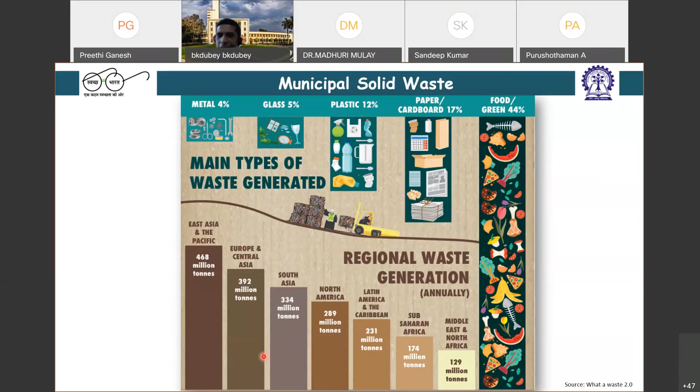If you go to Singapore, if you go to Seoul, if you go to any such places, they don't change their policy overnight. When they make policy, they do a lot of deliberation, a lot of discussion goes on—you have to bring all the stakeholders to the table.

So tomorrow, if I say compost should have this quality, but as a city I don't give them source segregated waste, yet I'm telling the compost company they have to maintain this quality—how will he do that? That's totally ridiculous. How can a company produce a good quality product if the raw material coming to him is totally bad? He will not be able to. Expecting him to produce a good quality product means that person does not understand waste management.

So looking at the components, food and green waste is 44% globally—that's mostly what you can go for composting. This is the global figure; the Indian figure is slightly different. Now, in terms of what is happening with this waste, open dumping—again globally—33%, one-third of the global waste, is just going to open dumps.

One third of the global waste is just going to the open dump, that's not even a sanitary landfill. I'm assuming all of you are civil engineers or have some environmental background, so I'm not talking about what a sanitary landfill is. I'm assuming you know, and if you don't, you can always ask me. So it's 33% just going to open dump.

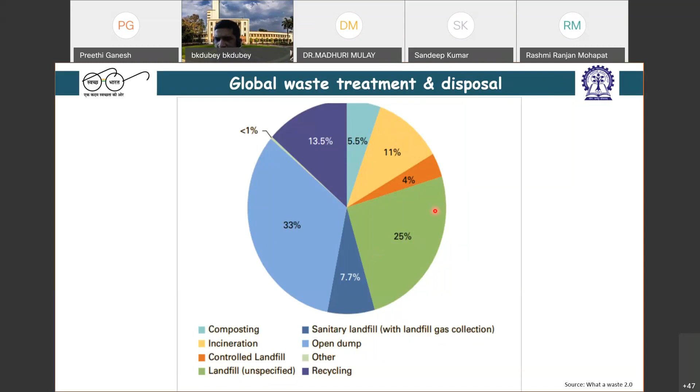If you look at the income level, low income countries have 93% open dump. Low and middle income countries, 66%, 30% in upper middle income. Even in high income countries, 2% is open dump sites. So it's not that high income countries don't have any dump sites. In the remote areas in high income countries, you will find dump sites. In the Appalachian Mountains in the US, in Tennessee, Virginia, North Carolina, that area, you will find some open dump sites.

Then landfill is the sanitary landfill. As you go from high income to low income, you can see that high income actually has less landfilling, but they do a lot of recycling, 29% recycling, 22% incineration, which with incineration is thermal treatment, not open burning. Open burning of waste is totally no, you should not do that. And as you go to the lower income countries, you see only 3% is sanitary landfill, 3.7% recycling.

Now if you look at the Indian data, we say we recycle. I think sometimes we say almost our recycling rate is pretty high if you look at the CPCB document. But those are informal recyclers, and they do a very good job, nothing wrong with that. They do a wonderful job in terms of recycling. But the proper data collection is not there, so we don't really know the proper data collection happening.

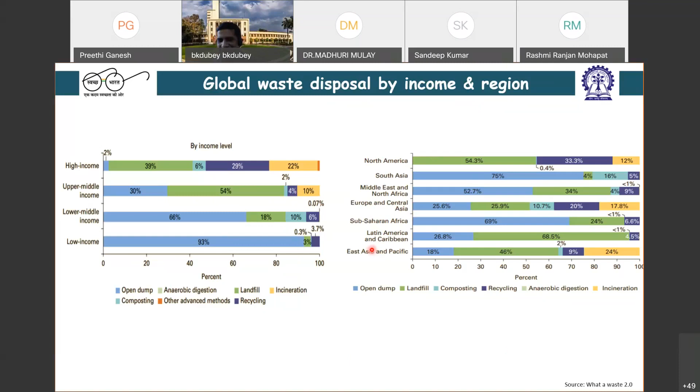Okay, thank you. So if you look at it by income, because in a country like India, which is so big, the example I was telling you works like this: if you are in an urban area and want to set up a compost plant but are not able to sell the compost in nearby places, then it becomes a problem. The plant will not be sustainable for a long period of time.

So to overcome that, you can go for anaerobic digestion where we can produce biogas and use that biogas. That's what we proposed to Guwahati. I don't know whether they will listen to us because they've taken up the report, but hopefully they will, because there is a lot of pressure on Guwahati city to set up a waste to energy plant, like an incineration plant.

Based on our work, which was quite extensive, we sampled Guwahati city for 3 different seasons over about 1.5 years. There are 6 zones, so we sampled in each of the 6 different zones with multiple samples, trying to get as representative a sample as possible from that city, spending a lot of time and energy on it.

Our data suggests that a waste to energy incineration plant, as of the present situation in Guwahati, is actually not a good idea, because they don't have that much calorific value, and they don't even have that much combustible waste. For any plant there is something called economy of scale, you need a certain amount of waste coming in. For a waste to energy plant, you need at least 250 to 300 tons per day, and they don't have that much waste.

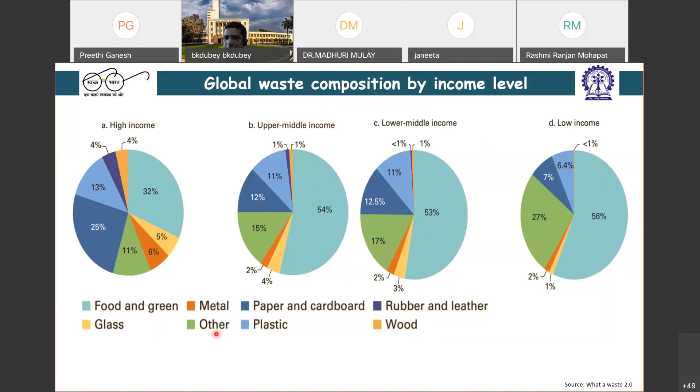Coming back here, if you look at global waste composition by income level, we will be somewhere in the lower middle income category. Around 53% is food and green waste. So there is a lot of potential to produce compost in India if we keep this food and green waste separate. If it gets mixed up with plastics, metals, and glass, then the compost will not be of good quality.

And if you look globally, a lot of food is wasted. Unfortunately, that tendency is coming to India too. There was a study done in Canada a few years back where they found that a typical family...

So, any question? If you don't have any question, please mute so that we don't hear that background noise.

So what I was trying to say is that there was a study done where it was found that a typical North American family wastes close to $1,000 worth of food in a year. That's for a family of four, and Christmas just went by. So $1,000 divided by 4 is $250. $250 will buy them a very good iPad today. So they could have bought a good iPad for all four of them if they had not wasted this food.

It's... all organisms... Preeti, can you please mute? Or if we have somebody from NIT Warangal, if you can mute him or her, that would be good. I'm not able to mute her. So please mute so that we don't get that background noise. It's irritating, isn't it? If you have some question, please ask, otherwise please mute.

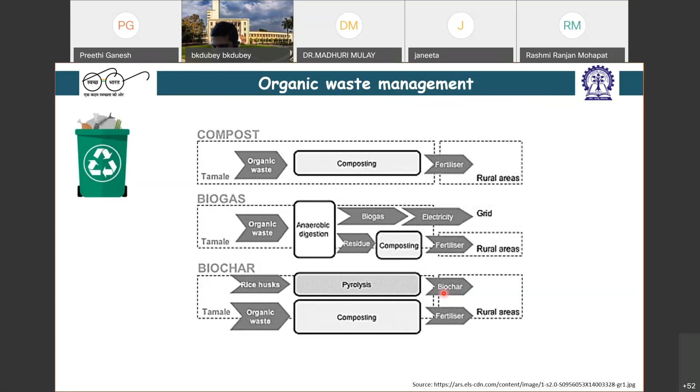That's what our lab study suggests, that we have to do a pilot. We are looking for some pilot partners, and some companies have approached us as well, where we are trying to do some pilot work on that.

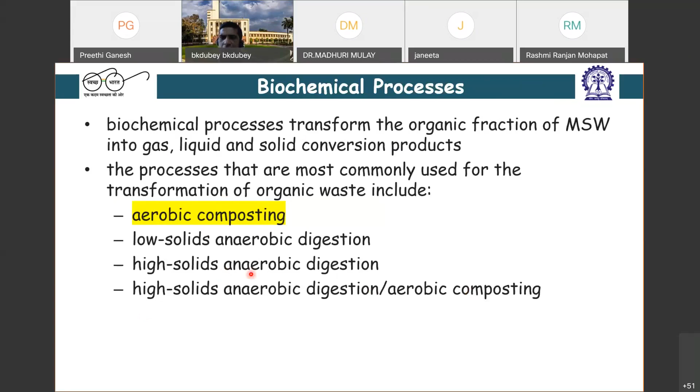In terms of biochemical process, you may have heard from other professors in the last four and a half days about different biochemical processes. Aerobic composting is what we are focusing on here, and then there are low solids anaerobic digestion, high solids anaerobic digestion, and aerobic composting. Those interested can look at the biological treatment chapter from the course on YouTube that one participant just mentioned. The major objective here is to convert the organic matter in waste into a stable end product.

Aerobically, we call it a composting process. Anaerobically, we call it a fermentation or anaerobic digestion process. Composting is a succession of facultative and obligate aerobic microorganisms. They feed on the organic matter and convert it to new cell tissues, and that's how compost is formed.

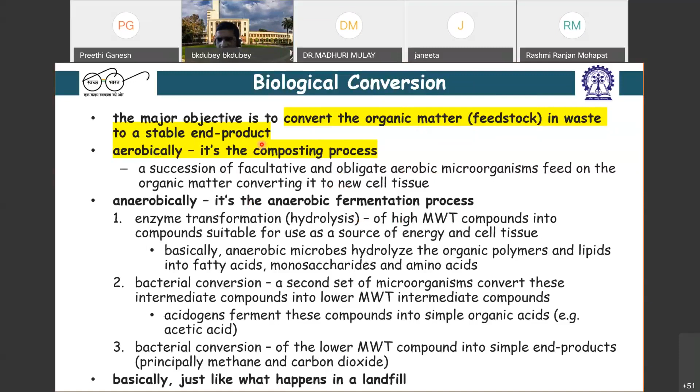Composting is an aerobic biological process in which naturally occurring microorganisms convert biodegradable material into humus-like compost. It's basically biological reclamation of organic material, a natural decomposition process. You can see decay of fallen leaves, decay of wood, animal carcasses decaying in a preserve.

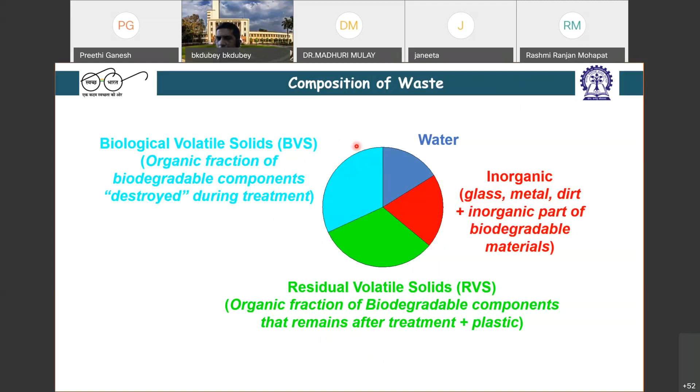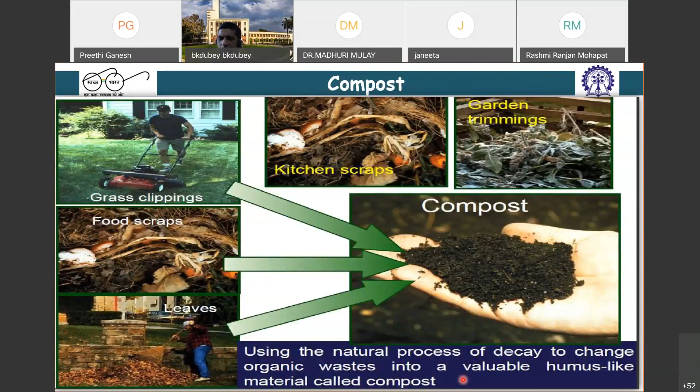Compost can be made from grass clippings, kitchen scraps, garden trimmings, food scraps, or leaves. All these things can be used to make compost. It's a natural process of decay of organic matter into valuable humus material, which is called compost.

Now, composting, you supply organic material, you supply some minerals, because any biological treatment, it's the microbes doing the job. It's aerobic microbes here, and in anaerobic digestion, it is the anaerobic microbes. So it is the microbes which do the job for us.

What we are doing as a compost engineer, solid waste engineer, or environmental engineer is creating the condition suitable for these microbes to work. It is the microbes which do the work for us, and we have to make the condition suitable. Microbes need oxygen because it's an aerobic system.

So you need oxygen supply, and it has to be distributed nicely through the compost pile. You also need to give them some minerals and water. Minerals, because when we eat, we do not only eat rice and dal, we need fruits, vegetables, and other stuff to supplement our mineral requirements.

This bacteria, the microbes, also need to have some strength so they can proliferate and their population can go up, and they can carry out degradation of the waste. For that, you need to provide certain nutrients. We have to have a proper carbon nitrogen ratio, and of course moisture is needed for any microbial process.

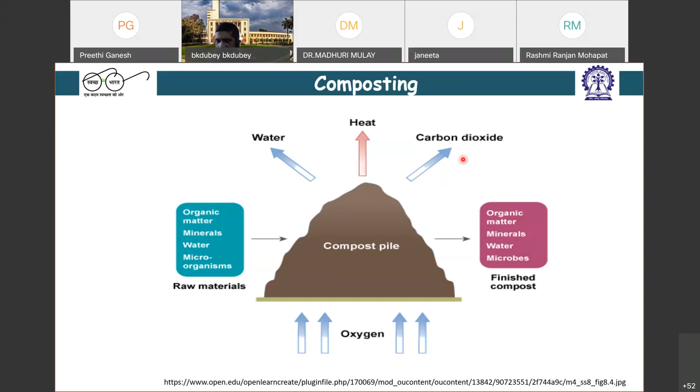Carbon dioxide also gets released. It's an oxidation process, so carbon is getting converted to CO2 as well. So in composting, you need to have a better feedstock, which has a good carbon nitrogen balance.

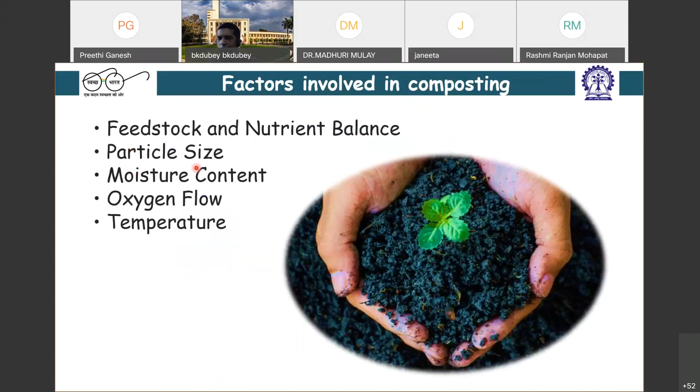So that's why nutrient balance matters. You have to have a good particle size for good moisture, good air movement, moisture content, oxygen flow, and temperature. I'm pretty sure you talked about this earlier in different lectures over the last 3 days, isn't it?

So these are the typical carbon nitrogen ratios. We can go over that a bit faster. I think I have another half an hour, so I'll go a little faster, and then we can keep some time at the end for questions and answers. So this is your different kind of feed.

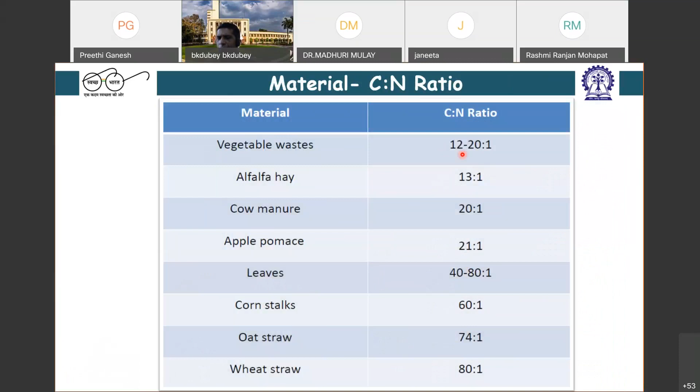So that's your carbon nitrogen ratio. We need to have an optimum carbon nitrogen ratio of around 25 to 30. So we have to mix material which is high in carbon and low in nitrogen with the other way to get the optimum ratio.

We already talked about carbon nitrogen ratio between 25 to 35. So that's carbon to 1 nitrogen. Particle size around 50 mm. Moisture content 50 to 60%. There's the airflow given, and temperature 55 to 60 degrees centigrade for the first 3 days.

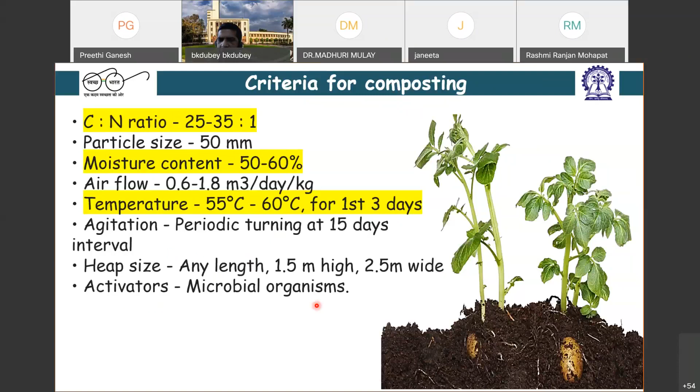So in terms of optimal composting, you need oxygen concentration in the range of 13 to 18%, and the particle size is between 3 to 50 mm. Your carbon nitrogen ratio is certain based on your active composting, curing, and product. Moisture content, temperature, pH - all those you can look at.

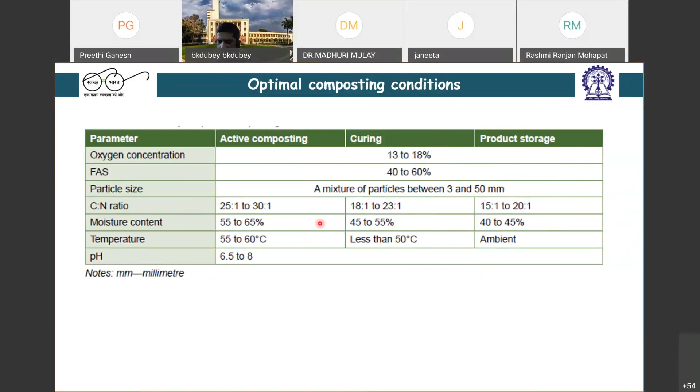There is a CPHEEO manual which you might be familiar with. The Swachh Bharat document, the big compendium of Swachh Bharat, is also there, which talks about these conditions too. So you will find similar numbers in terms of temperature, moisture content, and all that.

So what is happening here is your microorganisms react with organic matter. They basically use the organic matter as a food source, and they produce CO2, heat, and finally the compost product.

So three phases under optimal conditions. You have a mesophilic phase, which lasts a couple of days at around 40 degrees centigrade. Then you have thermophilic, and then you are also having...

Let me switch off my video. It was telling me that there was some problem with that.

So then you had thermophilic, which can last for a few days to several weeks. Then you can have several months of cooling and maturation phase as well, which can give you a better matured compost.

Aerobic bacteria - the aerobic system we're talking about - so there are a diverse set of aerobic bacteria. We have fungi, bacteria, insects, and worms. So those kinds of organisms work on our composting process.

Anaerobic, again I'm not going into detail on that. So this is the reaction which takes place. You have this matter, your compost, we call it feedstock. In presence of oxygen and nutrients, microorganisms will act on it, produce compost, produce new microorganisms, and the old ones will die and become part of the compost.

Sulfate, and then some heat is also released because of the exothermic process. So the end product remaining after microbial activity is called compost. The new cells, like new microorganisms that are produced, become part of the active biomass, and when they die, they become part of the compost. So that's what they're also - organic matter.

Your quality may go bad, so one critical thing is having a good carbon nitrogen ratio, and many times you have to blend organic waste together to achieve it. For example, digested sludge has a ratio of 15:1, and leaves and other things have a ratio of 40:1 to 80:1. If we mix this together, we can achieve around 25:1. We have to cut it in a particular ratio.

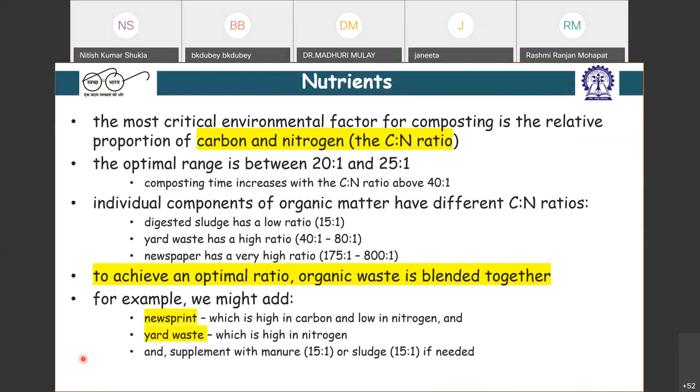Newspaper is very high in carbon, low in nitrogen. Yard waste is high in nitrogen, and you saw other examples which are high in nitrogen as well. So these are some tables of different stuff, which you can find in any textbook. These numbers are available, and you have these slides, so you can look at those later as well.

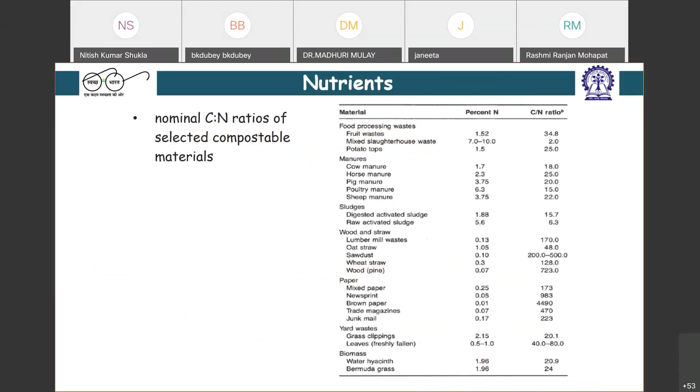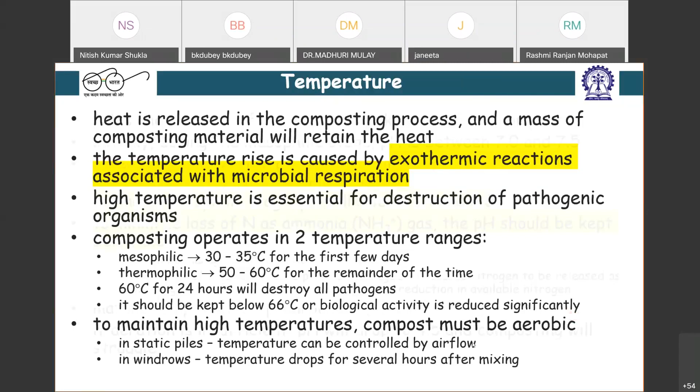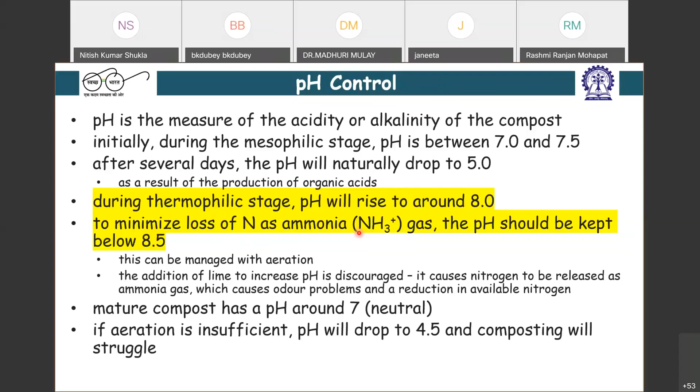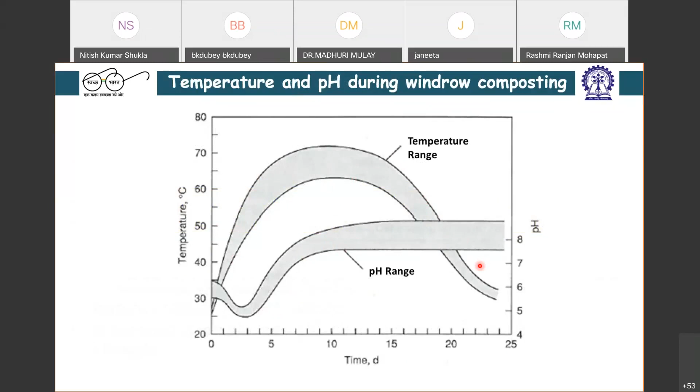So other environmental factors, we have to keep the moisture typically 50 to 60% on a wet basis. We don't want too much moisture. If you have too much moisture, what will be the problem? Your void spaces will be filled with water. If the void spaces get filled with water, air will not pass through, isn't it?

We have to do aeration. It's an aerobic process, so we have to do aeration. If the void spaces are filled with moisture, your aeration will not happen, so it will be difficult to push the air through. That's the reason we have to keep a very close eye on the moisture content as well.

And sludge is a good source of moisture. If we have to add moisture, sludge is a good source. Organism, blending and seeding - you need to have organisms necessary for decomposition. So we do mix 5% of partially decomposed compost back to speed up the process. And again, sludge is also a good source for giving the seed, giving the microbial population.

Particle size 25 to 75 mm is beneficial - exposes more surface area, allows for easy air movement. So you want to make sure that there are good void spaces. You have to do mixing and turning to prevent drying, caking, or air channeling. Channeling is where you get a path where the air is passing through rather than mixing with the entire garbage. So we have to avoid those.

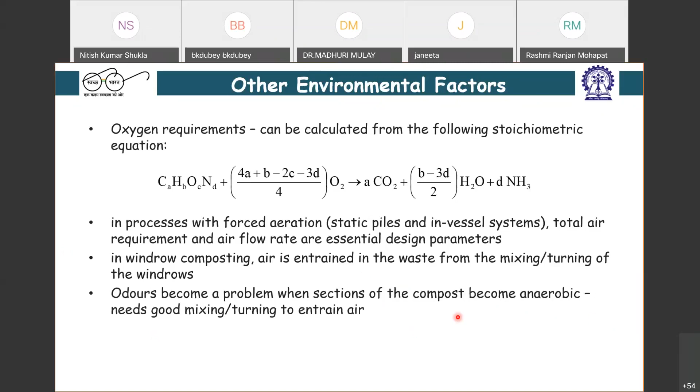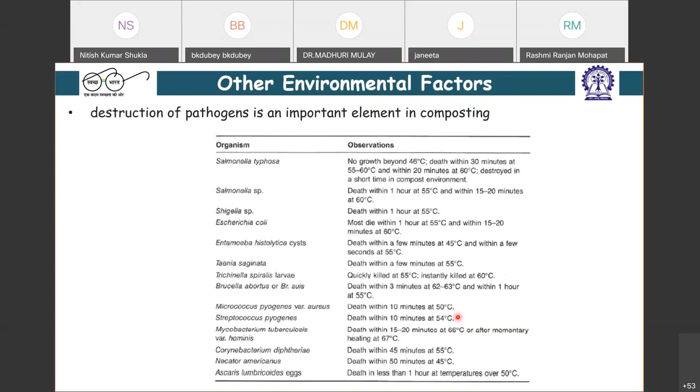This is some example of at what temperature these pathogenic organisms die. You don't have to remember any of these names - just look at the maximum temperature given there, which is 62, 63 degrees centigrade. So if you can just bring it around 65 for some time, for an hour or so, or even 3 minutes - it says 3 minutes at 62, 63, that particular organism will die. Otherwise most of the organisms die at 60 and below. So if we can keep it at 60 and above for some time, for a few hours, our pathogens will be destroyed during the composting process.

Now, how much time does it take for compost? It depends. If you have a mechanical system, you can do it in 7 days. If you have a highly mechanized system, if you have piles, windrows which are turned, it is 9 to 21 days. If you have static piles or some mixing, 30 to 40 days.

There is no composter in the world which can do compost in 24 hours. You may have seen several advertisements in India and some other places too, where they claim that they are doing compost in 24 hours. We are all students of civil and environmental engineering, so we know that it is not possible for microbes to do something within 24 hours. It is actually not possible from a microbial point of view, based on whatever wastewater microbiology we have studied. So if you get that kind of claim, please ask them tough questions, and you will find out that it's just a marketing gimmick. There is no composting happening in 24 hours. So it takes time.

It will, if you have a highly mechanized system, that also takes a week. So it cannot happen before that. You can make something, but that will not be compost. You can make it totally dry and do something with it, but that's not really compost. So when is the process finished?

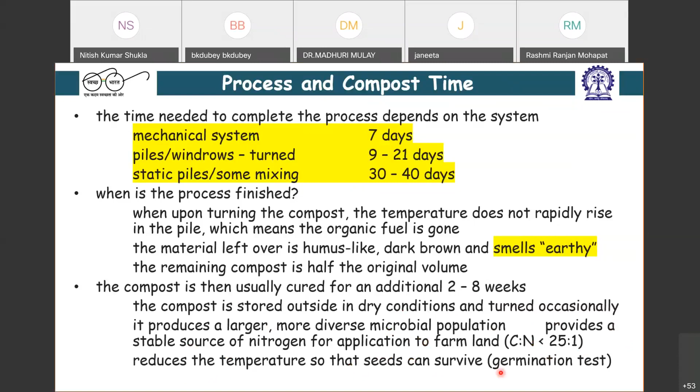So compost, you can put it in dry conditions and turn it occasionally. You have a more diverse microbial population, provide a stable source of nitrogen, and the CN ratio will be less than 25:1. You can reduce it, and also when it gets cooled down, seeds can survive. We do a germination test to find out that quality as well.

Aerobic composting, you can do agitated or static. Agitated means the material is agitated periodically to introduce air. Static means the material remains static, air is blown through the compost. So whatever it gets, it gets.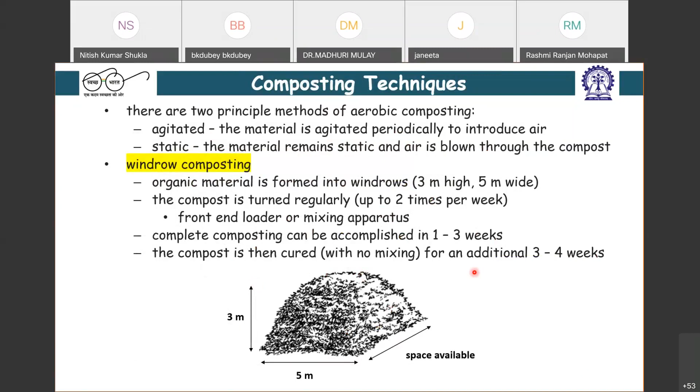Windrow composting, typical, all of us are familiar. You put it in windrows, turn it regularly, you can use a front-end loader. Complete composting can be done in 1 to 3 weeks, then cure for another 3 to 4 weeks to make a good quality. Aerated static pile is where you inject air.

Compost is on top of a blower, so you have a blower system injecting air through it. The blower is controlled by a timer based on temperature, either positive or negative pressure. When the temperature goes down, that means the aerobic microbial activity has gone down. You pump some air, you see the temperature going back up, and then you stop.

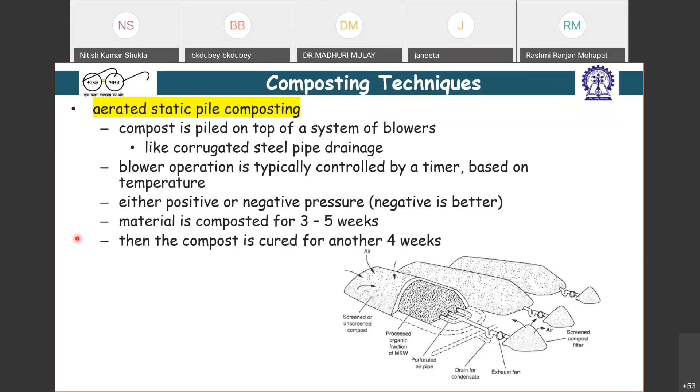Again, temperature goes down, you pump some air. So you can put some sensors, and it can go on automatically. You can blow air or suck air, either positive pressure or negative pressure, both are done. It takes 3 to 5 weeks, and the compost is cured for another 4 weeks, and then your compost is ready.

This is a turner which will go and do the turning part. It will go and mix it as you make progress in composting.

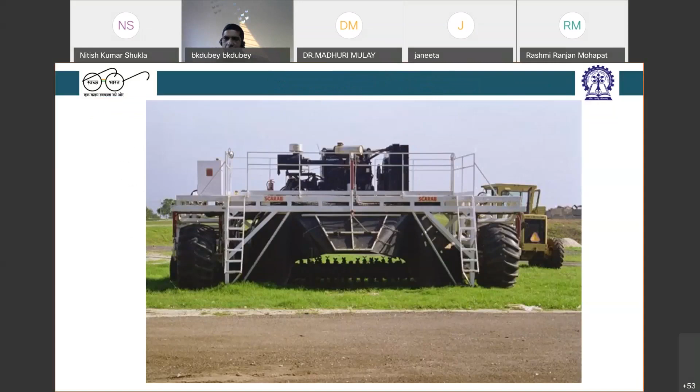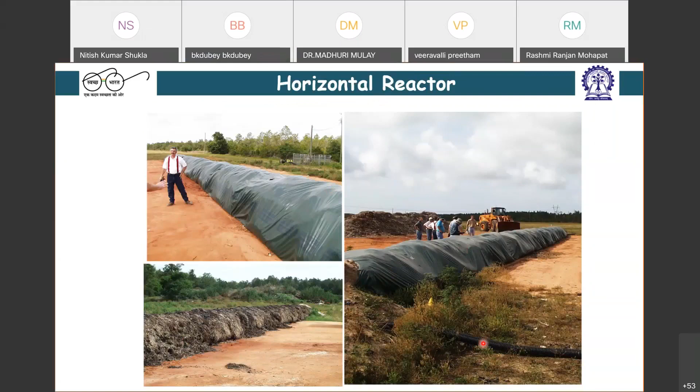Then this is like a reactor kind of compost, this is your horizontal reactor. You have the waste which is covered, and this is the pipe blowing air through it. You can have a mechanical in-vessel system where you put the waste, and it goes from one tray to another tray to another tray and goes down.

By the time it comes down, it has composted. It takes 4 to 7 days, it's a rapid process. You can make this kind of composting, but it's costly. Essentially, you pay for the speed, so it depends on what the expense is.

If you don't have land availability and you have to make compost, you can go for something like this. But if you have land availability, you don't have to go for something like this. Why spend more money if land is not a problem? If land is a problem in big cities, then yes, you can go for something like that.

Again, you look at water content, oxygen, it has better control of temperature and odor. Since the composting process was fast, you need a longer curing time, so you require more curing bed. Land-wise, you're not really saving much, but you can take it to the outskirts and let the curing happen over there. It's more expensive due to mechanical configuration.

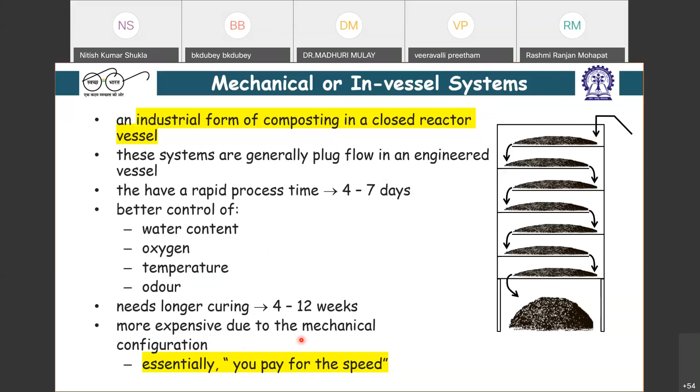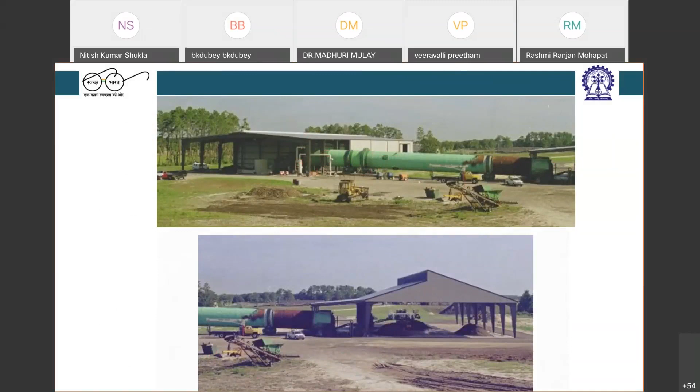So again, it's not compost yet, but it's degraded now. It can be taken to the curing bed where it will be kept for a longer period of time.

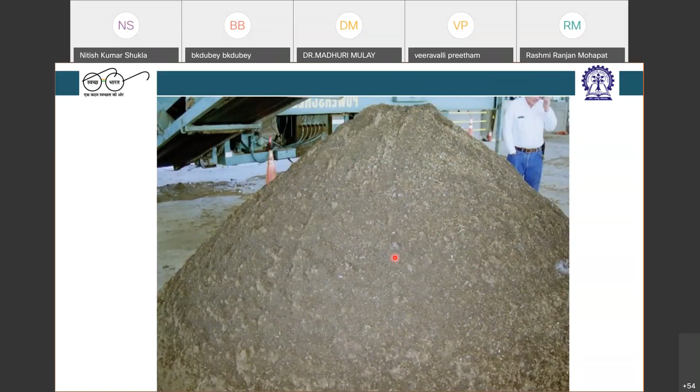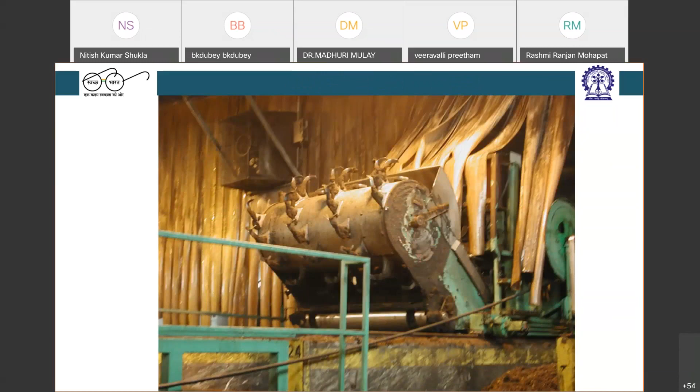You can have these kind of agitated bin systems. You have bins for composting with a mixing device that gets into those piles and keeps on mixing. You see all those hands or teeth, whatever you want to call it, that go into the waste and keep mixing the garbage. It has a long arm that can extend, so it will go into the garbage and keep on mixing them.

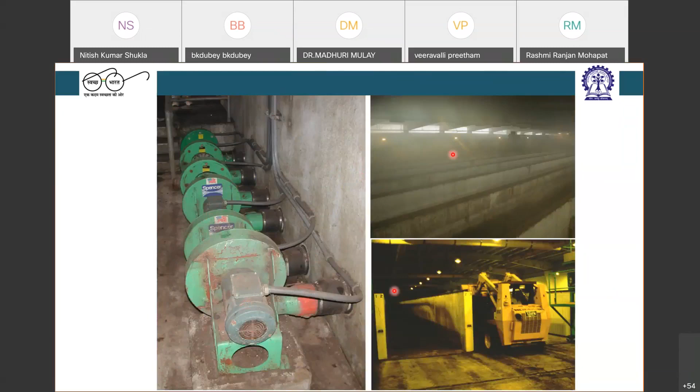And these are the blower systems where you are adding air through to those compost piles over there. And whatever this building inside is, is the compost plant. So even in a good compost plant, you will have some anaerobic activity happening.

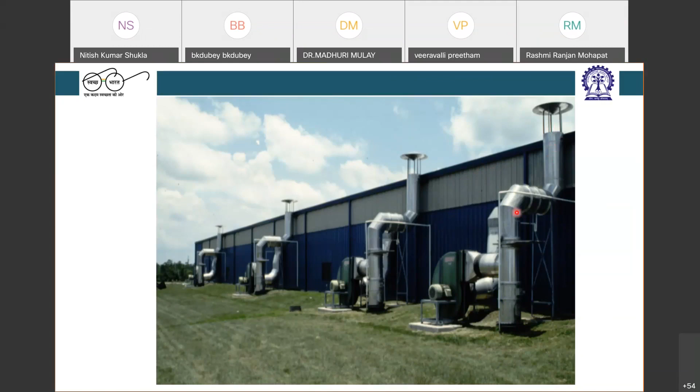So you will have some smell issue, and if you have nearby residences, that smell may become a problem. So what some facilities do is keep this building under vacuum. They suck all the dirty air and pass it through a biofilter, and then the clean air is released to the atmosphere.

You can do backyard composting too, if you have a bigger house. You can do the backyard composting, which can be used as well.

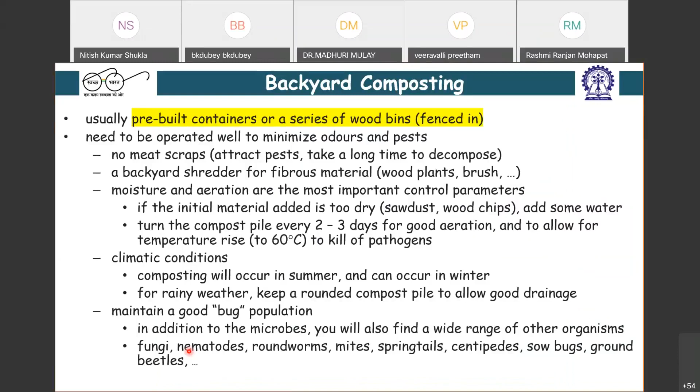So when you do a compost plant design, I think you have already done this, some professor talked to you about that. But just very quickly, you should have enough space to handle at least 2 days of waste. In case of vehicle collection, the surge amount and downtime of the plant should be processed at a uniform rate. Inorganic materials should be separated.

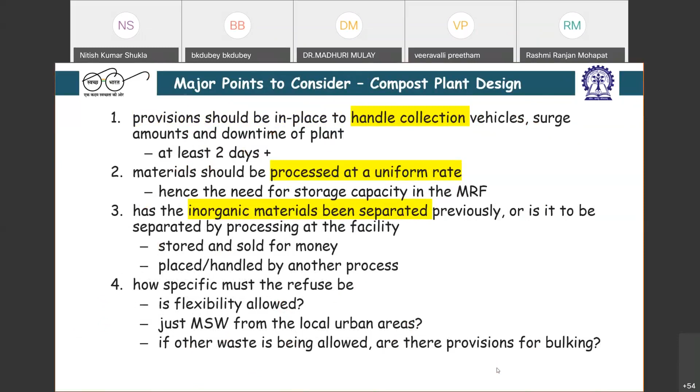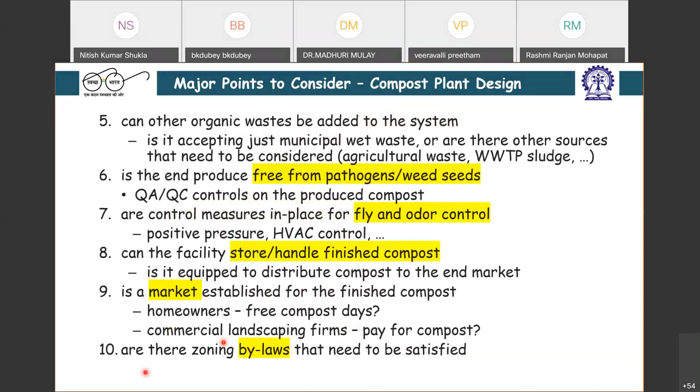You should be specific about how much flexibility is allowed - just MSW from local areas, or are you using some other waste stream as well? Can other organic waste be added, like sludge, agricultural waste, and all that? Is the end product free from pathogens? You have to do quality control - fly and odor control, HVAC control as well, and decide where to store and handle finished compost, where the market is, and are there zoning bylaws in terms of waste collection and all that.

So specifically in terms of design parameters, you have process design, carbon nitrogen ratio, moisture content, composting area sizing, and finished compost storage area, runoff collection - you have to do land treatment design for runoff, because whenever the compost is there, you will have some moisture, which is essentially a leachate, and with the rain and all, you will have some stormwater runoff as well.

So you need to have some sort of collection system and treatment system for that. And costing - how much cost it will be, whether you should go for highly mechanized or manual, depending on the cost.

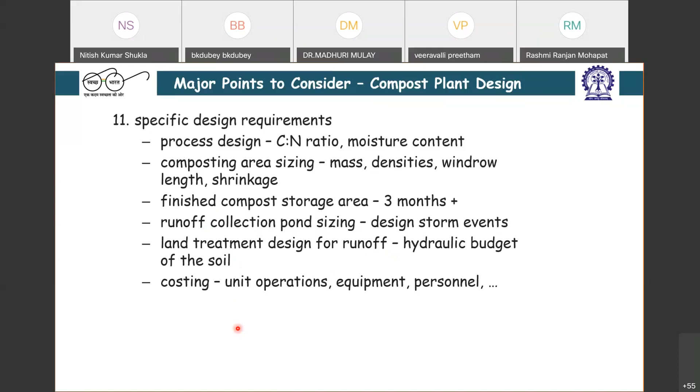So organic residue, if source segregated, could be composted, digested, and taken to market for different applications. In terms of quality, there are heavy metals and all - tomorrow morning you also have a lecture on some of these quality issues. That's why I kept my lecture more on the big picture, what needs to happen to keep compost quality good, but the nitty-gritty detail, I think tomorrow morning somebody is talking about that, as per the program, if I remember, you have something on compost quality too.

So there are heavy metals considered. This is a compost quality standard from Canada - we have Indian standards too. This is good quality compost and category B compost, and there are limits in terms of how much heavy metals you can have. These are all based on dry weight - all soil and compost standards are always based on dry weight.

Can anybody tell me why all these standards are based on dry weight?

Because different compost may have different moisture content, isn't it? So if you keep the wet weight, the numbers will be different. If it's dry weight, there's no moisture, so we can compare and have a standard. Otherwise, if it's wet weight, my compost may have 10% moisture, your compost may have 20% moisture, but we may have the same actual arsenic mass - yet one compost will pass and one will fail. That should not happen.

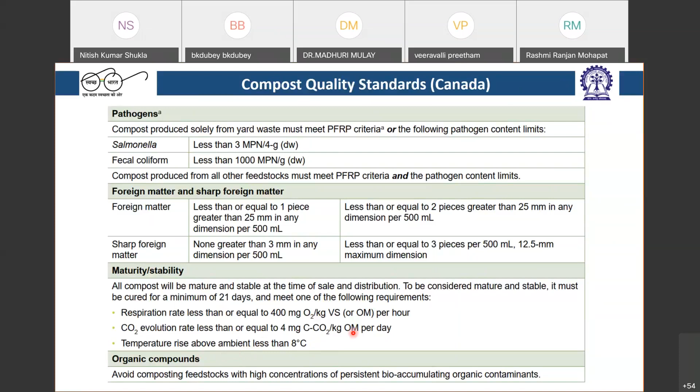Then there are standards for pathogens, again shown in this slide, which you can look at later. There is a standard for sharp foreign matter, meaning nails, glass and things like that. And there are standards for maturity and stability in terms of respiration rate of the compost. Temperature rise should not be more than 8 degrees centigrade above ambient temperature, meaning the organic matter has degraded. CO2 evolution rate should be less than this. So these standards are just to ensure good quality compost coming out.

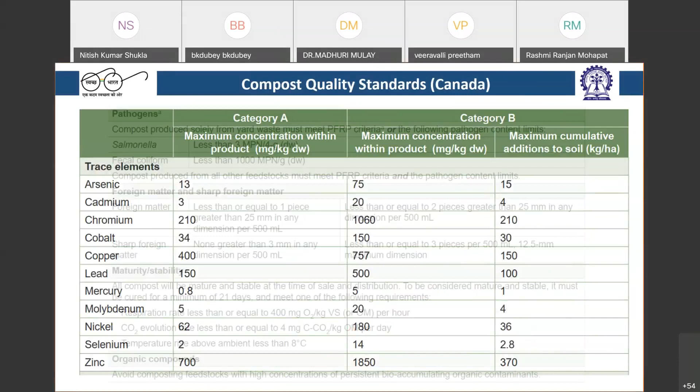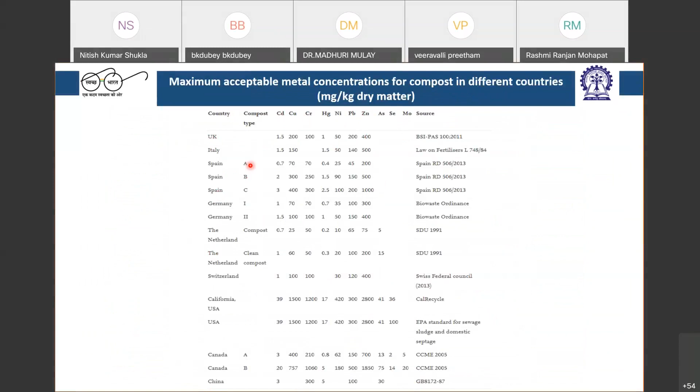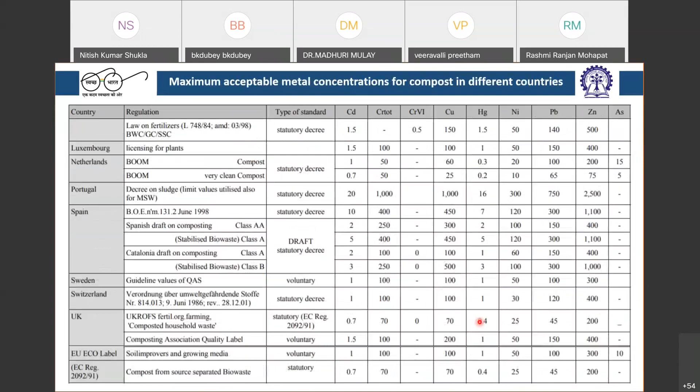Then there's a comparison table for different countries. You can look at it for different heavy metals, what the compost standards are depending on the type of compost, with different countries having different concentration limits, which you can have a look at. They are all based on certain risk assessment protocols. Okay, so I think we can skip that part very quickly.

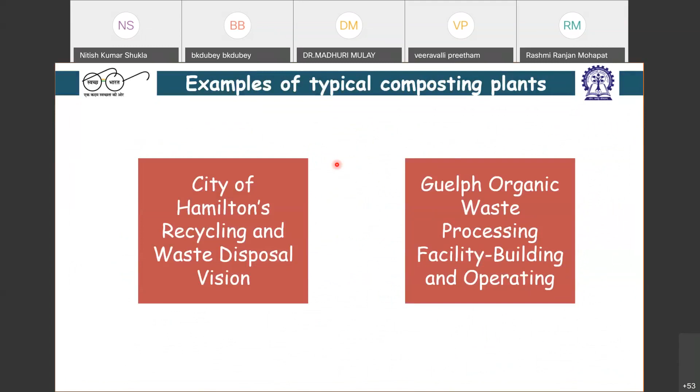Now we have only a few minutes left. Very quickly, I'll show you two composting plants. This is a compost plant.

Both of these are from Ontario, where I was working earlier. In fact, I was involved in both of these plants as a consultant, which is why I have these pictures and some information from them. So I'm just sharing it with you.

They had a central composting facility for the city of Hamilton. It's a source separated organics facility, so food waste was collected separately. This was the company running it on behalf of the city of Hamilton, but the plant itself was built by the city of Hamilton.

One thing I want to tell you is that although we think North America is a capitalist place where we'd expect everything to be privatized, in India we think waste management should be privatized to that extent. But in most Western countries, the majority of waste management tasks are still done by the city and state government, not private agencies. In an area like waste management, it takes a long time to recover return on investment, ROI is pretty long. So we do need our cities and states to be strengthened in managing waste. We have issues of corruption and such, and we need to solve those, because unless private parties are ready to be there for a long period of time, it's a marathon, not a 100 or 200 meter race. It's a marathon they have to run for a long time to really make an impact and really make money. Otherwise, they'll just chase programs like JNNURM or Swachh Bharat Mission for subsidy money, take the subsidy, and disappear. That's what has happened in the last 20 years in India's waste management sector.

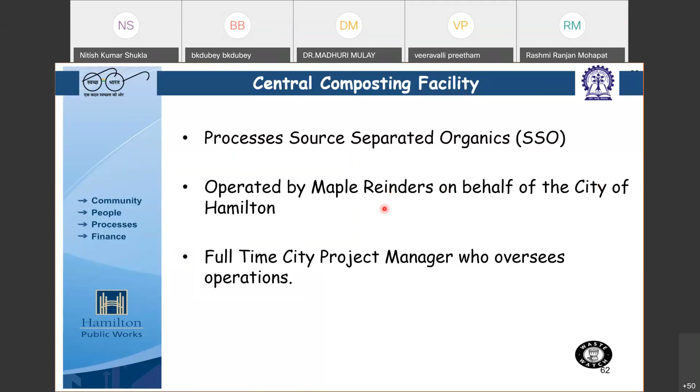So this plant was actually built by the city but operated by a private company, Maple Reinders, which is the private company operating it. But they had a city project manager, so the city was involved in this.

It's an aerobic in-vessel composting system with 60,000 metric ton processing capacity per month... per year, actually. It processed 32,000 metric tons in 2013. It serves around 1.3 million residents of the city, processing all source segregated organics, leaves and other yard waste. They have two tunnel phases and a curing phase.

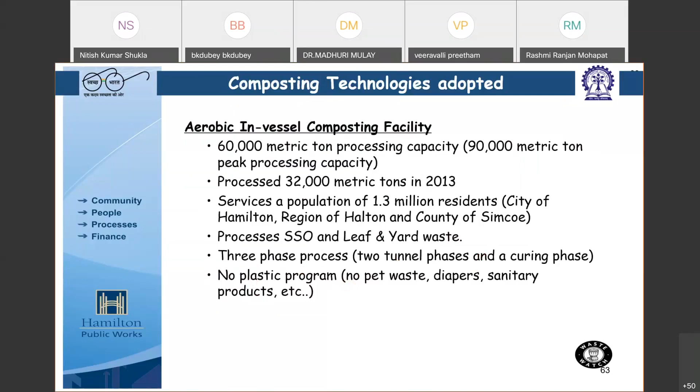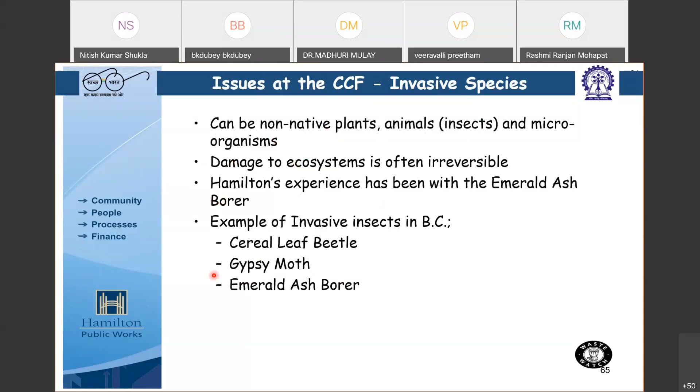They don't allow plastic in, so they're just getting food waste, leaves and other similar material. But there are still issues, even with sorting, they do get plastics in there, and sometimes household hazardous waste is hidden in the stream. Odor and smell are a problem. There was also a new guideline that was a bit of a concern for them. Sometimes they get non-native plants and some animals or microorganisms coming in, so there are a lot of other issues coming into their process as well.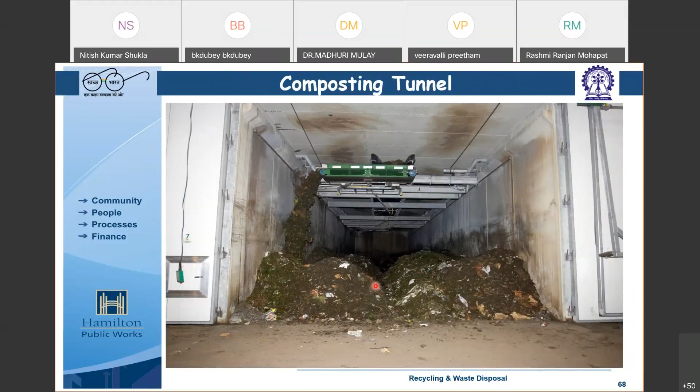Then this is the central composting facility, and they have these tunnels where the composting is taking place. The white pieces that you see here are not plastic, they're actually tissue paper from the toilets and others. So that's those white things you're seeing over there. Then they have a maturation place as well.

Another example, quickly: a 30,000 tons per year capacity source segregated organics facility at city of Guelph, where I used to live actually. I was part of the solid waste management committee of that city, one of the technical members, for almost 4 years, and we did city design of several facilities there as part of the city team.

Here again, this plant was designed by Maple Reinders. They partnered with AIM Environment who operates that plant. 30,000 tons per year capacity. It was designed, built, operate, and contract basis, with a 5-year contract, and then they had further extension.

So these are the capital costs. It gets 10,000 tons from the city and then 20,000 tons from other areas nearby. There's only 8 members who run this facility. It's an equipment intensive, not people intensive, operation.

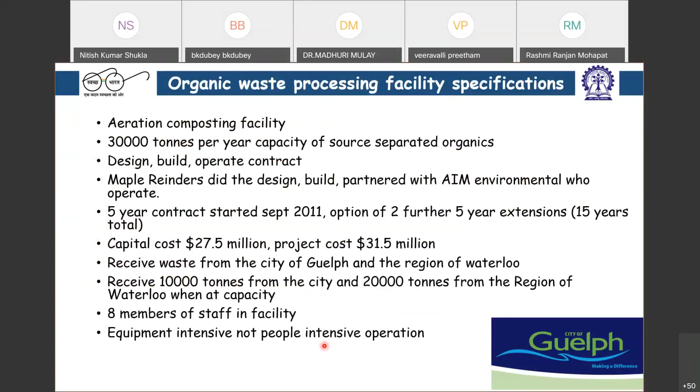So you can see the plan view. This is the maturation area, this is the tipping area where waste comes in, this is the transfer area, that's the compost bunker. From compost bunkers they take it to the maturation area where it's matured. Then from the compost bunker, any smell goes through this biofilter, and then into a chimney where the air is exhausted.

All of this is under vacuum, controlled, so that for the houses nearby they have to make sure there is no smell.

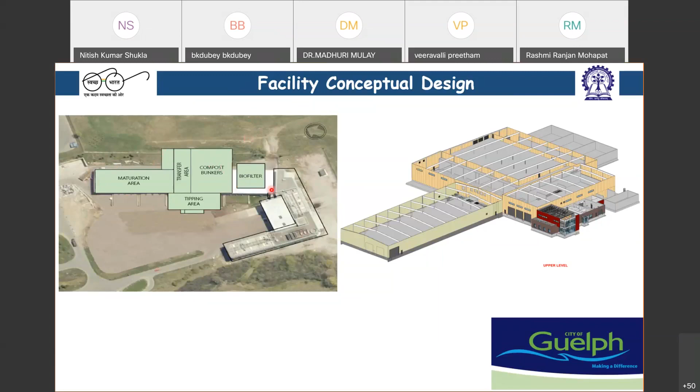So this is an example where the waste is coming in, then it goes into mixing and shredding, then to phase 1 composting, then phase 2. We have 4 bunkers here, 3 bunkers there. Then it does the screening, goes for maturation, then again the screening, then finished compost goes to market. The entire building envelope is under vacuum, so dirty air goes through this biofilter, which cleans it, and this is a stack from where it is released into the atmosphere.

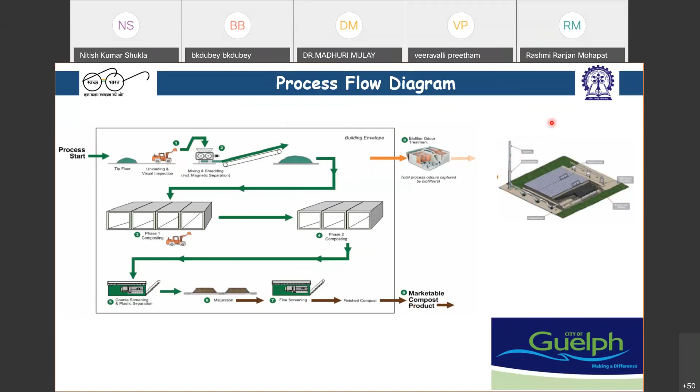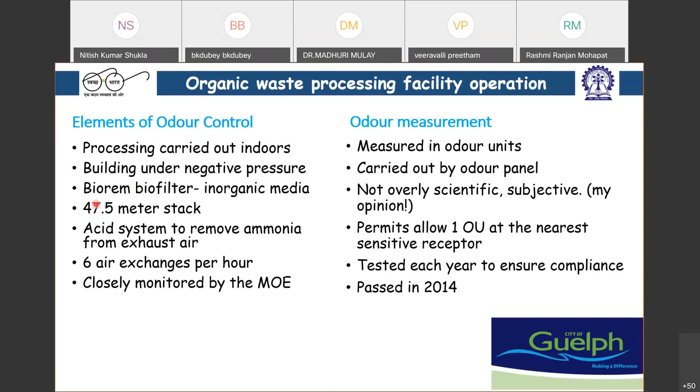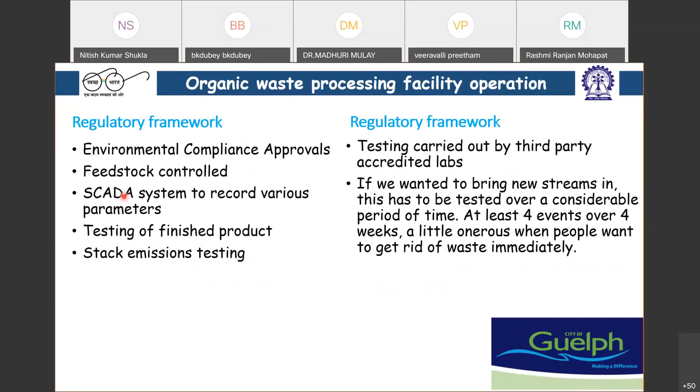I'll just skip this part on screening and maturing, you all know that. Then they have odor control using this biofilter. We have worked on this biofilter, and we also did a life cycle LCA on it when we were there. Then they have to follow this regulatory framework. They have a SCADA system, and they can see everything on a mobile phone as well.

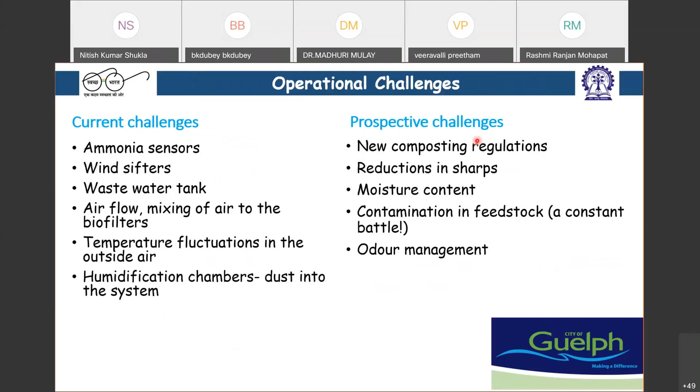So they have some challenges. Although it's a nicely run plant, there are certain challenges in terms of ammonia sensors, wind sifters, wastewater tank, airflow, humidification chamber. Then there are new composting regulations and odour management challenges as well.

Major concern: quality standards for heavy metals and impurities vary between countries and regions. They mostly depend on specific situations, soil structure, background concentration of pollutants, agricultural practice, which also dictate what the quality should be. Compost quality is best in countries with separate collection of municipal bio-waste; without that, the quality suffers.

Plastic pollution is going to create more problems for composting, and we have recently seen that we need a better quality assurance system. In Flanders and Germany, these standards are expressed not only in weight but also in surface area.

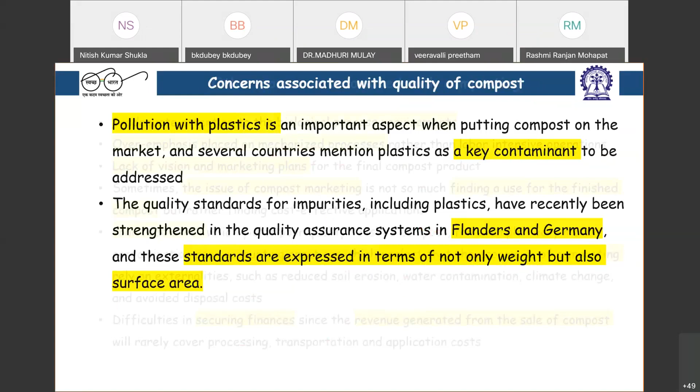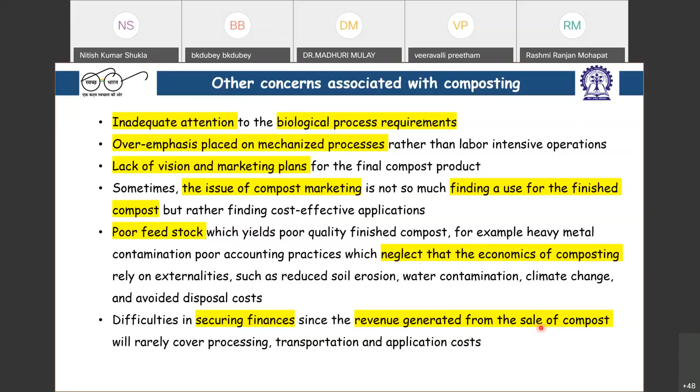Other concerns: overemphasis on mechanized process, lack of vision and marketing plan. From an Indian point of view, how to make compost marketable, finding a use for the finished compost, poor feedstock, neglecting the economics of composting, securing finances for these companies, because the revenue generated from sale of compost is actually pretty low and does not cover the processing, transportation, and application cost.

Subsidies can only be there for some time; subsidy cannot run the program in the long run. Municipal authorities have to do adequate waste collection, source segregated waste collection. Pathogens and weed, odor issues, rat issues, poor integration with the agricultural community -- we make compost, but our agricultural community is still buying chemical fertilizer.

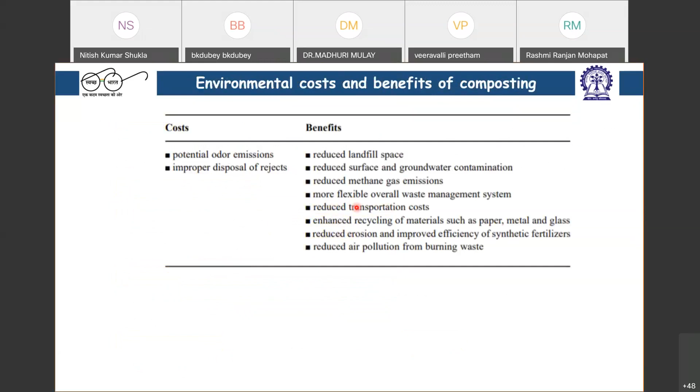So incentives such as fertilizer subsidy are needed; there are some incentives already in India. Land requirements are not that much, but it can still be a constraint. So you have to look at the cost benefit analysis of a composting process. Let's just skip the rest.

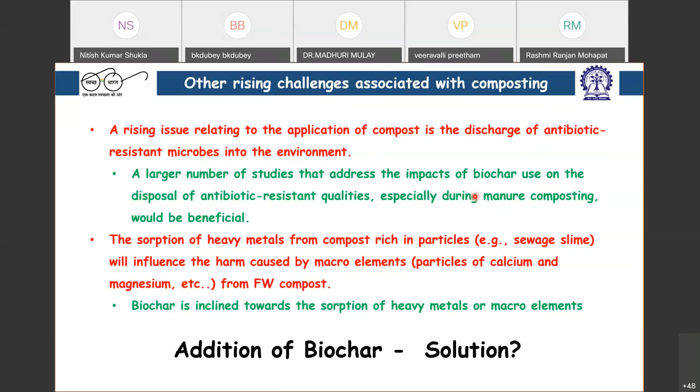Okay, these are fine. There is some research going on regarding addition of biochar for composting as well. Biochar use can help in antibiotic resistance quality, especially during manure composting. There are some issues in terms of discharge of antibiotic resistant microbes because of application of compost, and it says that biochar can solve this. In fact, there was recently a PhD done at NEERI, Nagpur, on the addition of biochar as a solution for composting. I was involved as an examiner for that.

So there are some recommendations in terms of capacity. We talked about technical and managerial improved policy, capacity building, increasing public education, doing full cost accounting, integration with agricultural and horticultural activity, and more focus on implementation and day-to-day operation. Those things are needed to make composting really successful. Provide technical assistance, low-cost facilities, evaluate land for composting, public awareness, use compost in public works and agricultural departments, and reduce subsidy on chemical fertilizer.

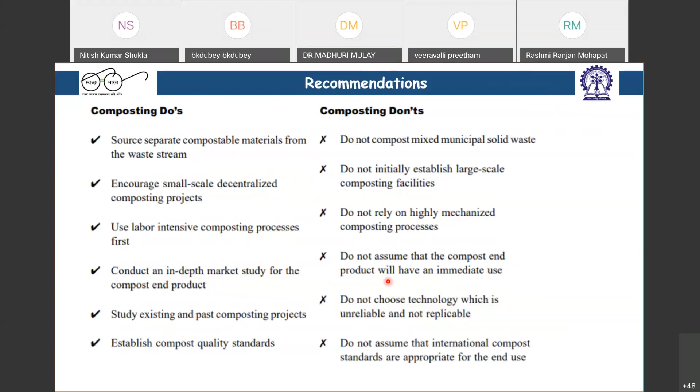So all these are kind of recommended do's and don'ts. Several do's and don'ts are listed here. I think that's it. I hope it was useful.